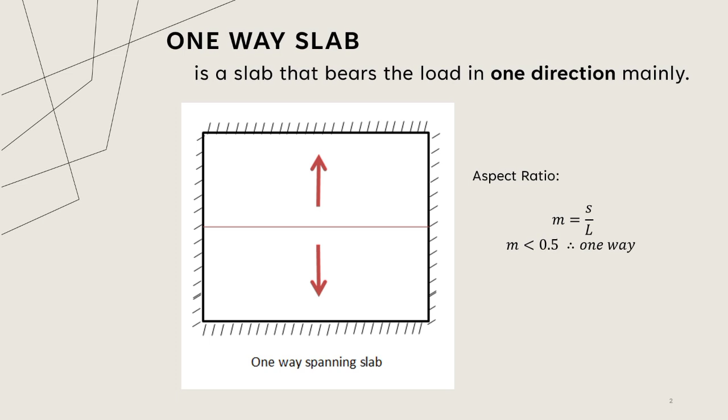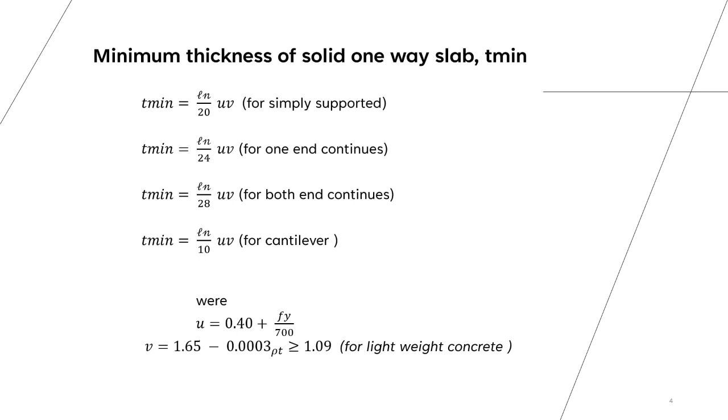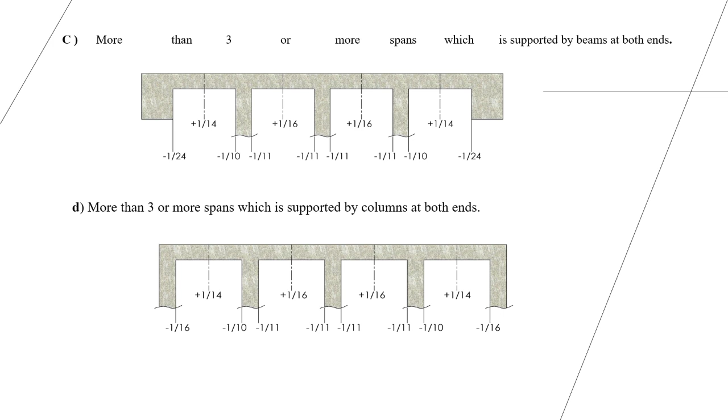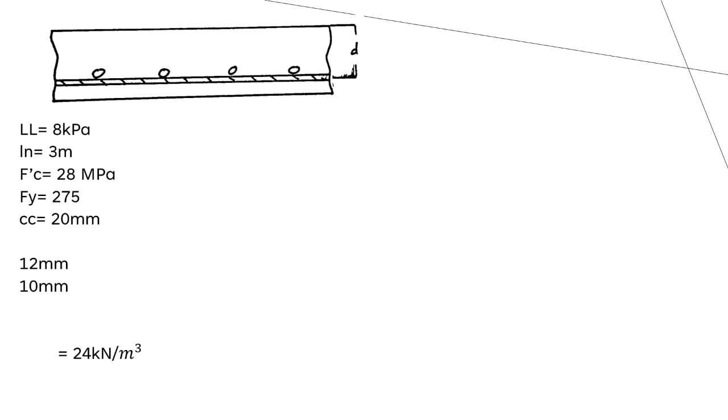So given the figure, we are going to solve the T-min, Mu, the spacing at 12 mm, and spacing at 10 mm. Yung 12 mm yung main bar, and yung 10 mm yung shrinkage or temperature bar. So first, let's solve for T-min. So our T-min is Ln over 20 multiplied by U, which is 0.40 plus Fy over 700. Ln over 20 kasi tinake natin siya as simply supported kasi wala namang sinabi kung ano siya. So from that, we will get the value of 118.929.

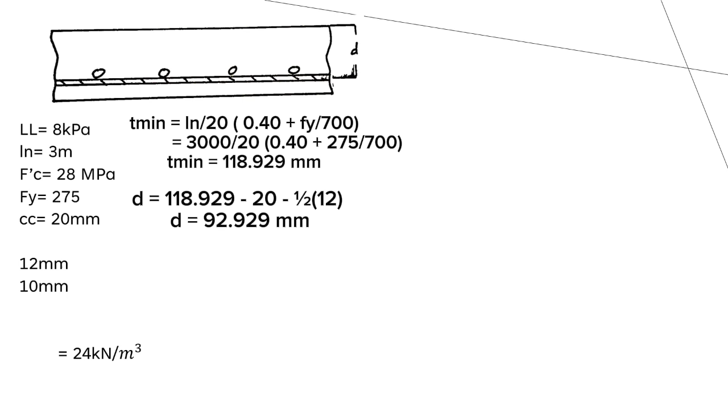So D, which is the effective depth. So ima-minus lang natin yung sa may total thickness natin na nakuha, which is 118.929 mm, minus the concrete cover, which is given naman 20, then kalahati ng ating main bar, which is 1/2 ng 12. From that, D, which is 92.929.

Next, let's solve for WU. Then we have the formula of 1.2 dead load and 1.6 live load. So wala tayong given na dead load, pero may given na tayong live load, which is 8 kilopascal. So let's solve for the dead load kasi meron naman tayong given ng unit weight of concrete.

So solve muna natin yung WD. So unit weight ng concrete, ita-times lang natin siya sa may thickness na nakuha natin, which is 118.929 times 1. So from that, makukuha natin is 2.854 kilonewton meter. Tapos sa live load, 8 times 1.

So from that, yung 2.854, then yung 8, yun yung i-replace natin sa may WD saka WL. So 1.2 multiplied by 2.854 plus 1.6 multiplied by 8. Makukuha natin WU is 16.22748 kilonewton meter.

So meron na tayong WU, we can finally solve for MU, which is 1 over 8 WU ln squared. 1 over 8 kasi tinake lang natin siya as simply supported. So from that, we will finally get our MU, which is 18.2529. So meron na tayong MU. Then from that, using this formula, which is alam ko naman na familiar na sa ating lahat kasi 'di ba sabi nga singly beam lang naman tong slab na to.

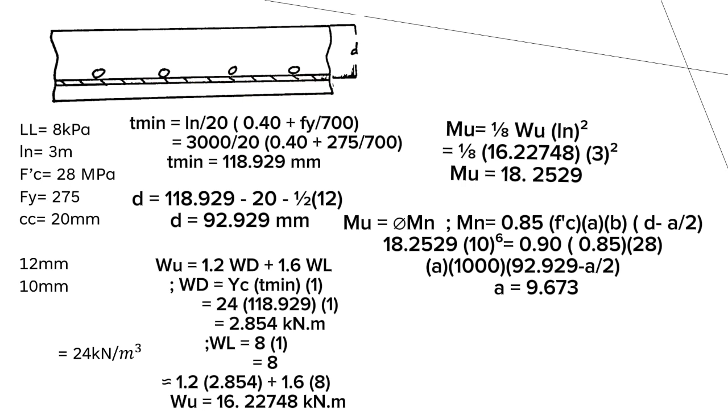Then from that, unknown si A. So replace lang natin yung mga value niya, yung F prime C, yung B, yung D natin kasi meron na tayong na-solve na ganyan. Then from that, makukuha natin si A, which is 9.673. So meron na tayong A, we can finally get our AS using this formula na C equals T.

So replace lang ulit natin yung mga given. Meron na tayong F prime C, given naman yan. Yung A, kakasolve lang natin. Yung B, then yung AS, hinahanap natin. Then yung FY, which is given din. So from that, we'll finally get our AS, which is 837.154.

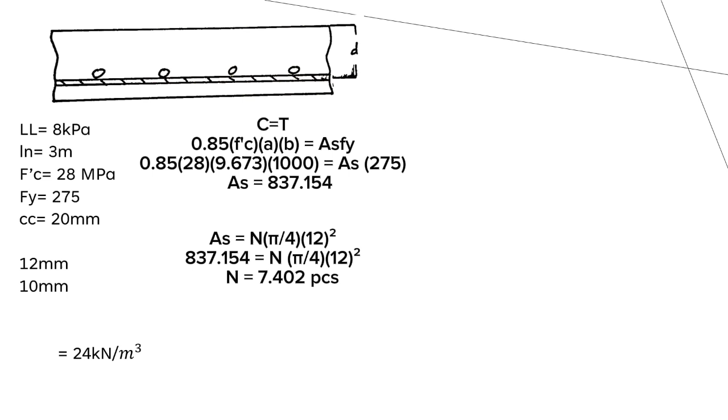After AS, we can finally get the N, or the number of main bar na kailangan natin. So using formula na AS equals N, which is the unknown, multiply by pi over 4, multiply by diameter ng main bar squared. So from that, we can finally get our N, which is 7.402 pieces. So after N, masasolve na natin yung ating actual spacing sa ating main bar.

So given the formula, S is equal to width over N. Yung width natin yan yung 1 meter strip. So 1,000 mm over number of pieces, which is N. Makukuha natin yung ating actual spacing sa ating main bar, which is 135.097 mm. So, tapos na tayo sa ating main bar.

Dito naman tayo sa may ating shrinkage bar or temperature bar. So, before that, solve muna natin yung rho min, which is 0.002 BH. So, yung B natin is 1,000 mm, then yung H natin is the thickness, which is 118.929 mm. Then, from that, we will solve our rho min, which is 237.85.

So, after rho min, makukuha na natin yung N, which is the number of ating shrinkage bar. So, given the formula na rho min over AS, so yung AS natin, pi over 4 diameter ng shrinkage bar, which is 10 squared. So, from that, makukuha na natin yung ating N na 3.029 pieces.

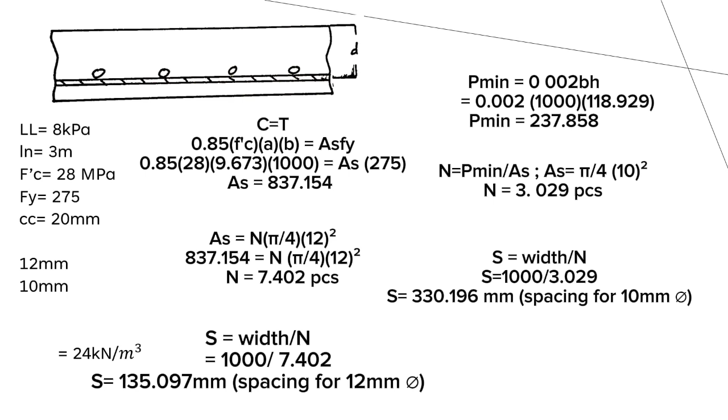So, meron na tayong N, makukuha natin yung actual spacing ng ating shrinkage or temperature bar. So, S is equal to width over N. So, yung width natin, 1,000. Then, yung N natin, kakakuha lang natin, 3.029. So, from that, we finally get the total spacing for our shrinkage bar na 330.196 mm. So, that's all.